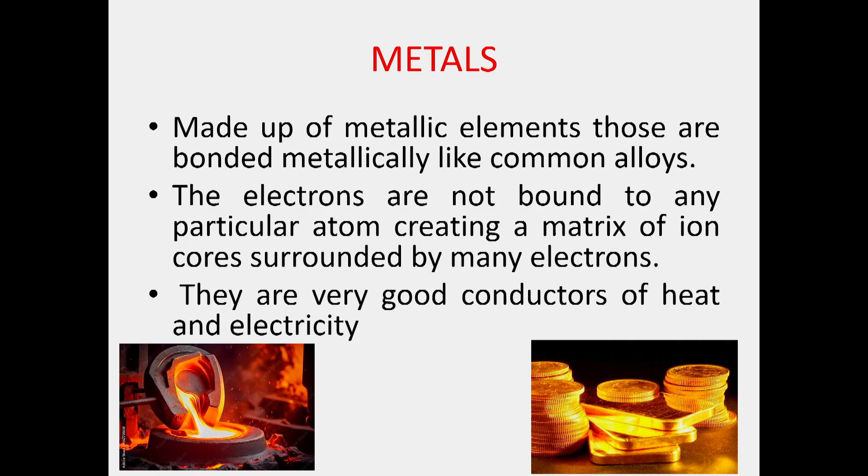So metals are typical materials having features like malleability, ductility, high electrical conduction, thermal conduction, metallic luster, etc. We need these properties for some engineering applications. There we do not have a substitution for metals. Metals should be used for that.

As a chemist, when we look into the construction of metals, it is something different. Metals are made out of nuclei, with a large number of electrons floating within. No electron belongs to a special nucleus; electrons belong to all nuclei. Electrons are happily running, and these running electrons are the postmen for the conduction of heat and electricity. So the assembly of metals is totally different, giving them charming properties.

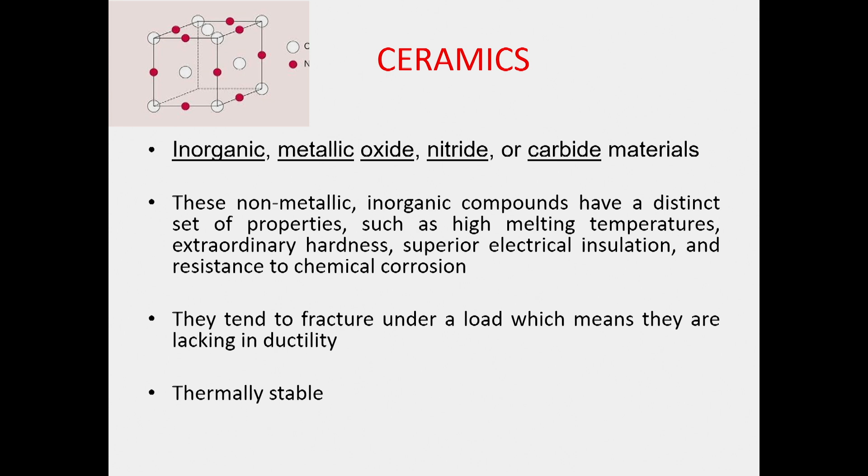If you look into the second category of materials, which are basically inorganic metallic oxides, nitrides, carbides, etc., we use them in everyday life. Even our wash basin is made out of a ceramic material, right? The beautiful tiles at home are made out of ceramics.

Many furnaces, typically the blast furnace, have an inner liner. No material can be used for that inner liner except ceramic, because the temperature goes up to 2000 degrees centigrade. So there is no substitution for that. When an inner fabrication of a furnace is required, only ceramic can be used.

We have seen in our old homes, our grandmothers used to make small furnaces out of bricks because they can withstand very high temperature. So when conduction, electricity, metallic resistance, etc. are the priority, we look for metals. If thermal resistance and inner lining fabrication of a furnace are the priority, ceramics are the priority.

Then we move to the third category of materials called polymers. These materials have a beautiful assembly. We all know small molecules, but scientists thought, if small molecules are connected together, why can't we make big molecules? Independently we are weak, but if we collectively sit together, we are strong. That's the basic principle of the construction of polymeric materials.

When a substance has a double bond or two functional groups in a molecule, that molecule can be polymerized. Single, saturated molecules cannot be polymerized. Methane alone is stable; it does not have the tendency to connect with a second molecule in a dimerization procedure. But ethylene has a double bond, so you can combine two ethylene molecules together to form diethylene.

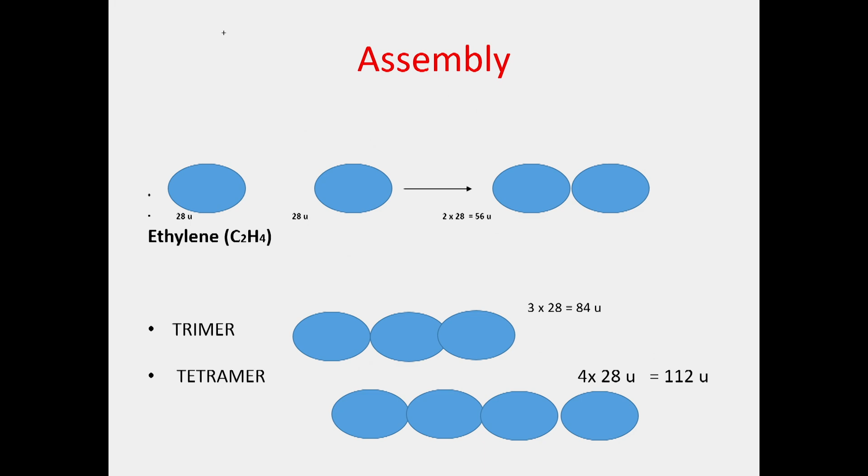So what we do is take ethylene. When ethylene is subjected to dimerization, you get diethylene, trimerized with three molecules, tetramerized with four molecules. When you do that, the length is enhanced to nano dimension. A single atom or molecule is in atomic dimensions - angstrom, 10 raised to minus 10 meter.

But when 10 of them combine together, we enter into nano dimension - 10 molecules, 10 into 10 raised to minus 10 is 10 raised to minus 9 meter, that is 1 nanometer. So we enter into the nano domain. Polymer science is nanotechnology - combining molecules together into nano dimensions, 500 nanometers, 1000 nanometers, etc. When we make such molecules, they have spectacular electrical, mechanical, and magnetic properties, which you can modulate.

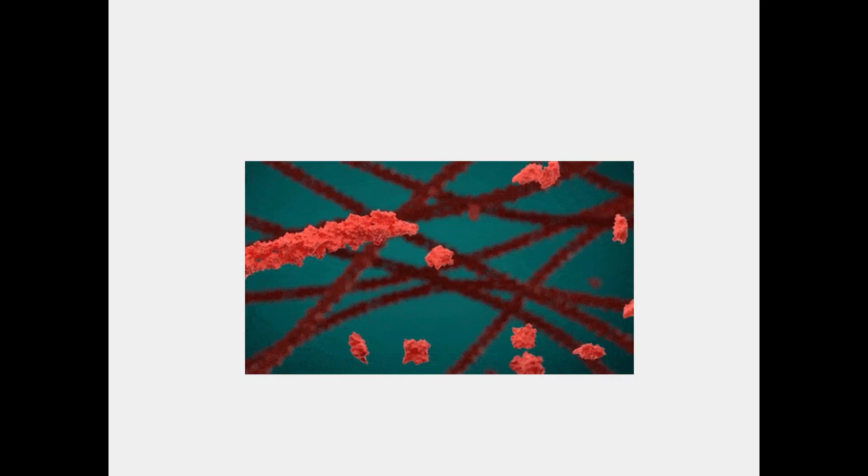So this is the job. People live for that, to make molecules which others have not seen. That's the dream of a scientist, making molecules or systems which others have not seen so far. Every evening they pray, help me to make a molecule which others have not seen. That's my contribution to society.

Why do we make such molecules? Because such molecules are useful to society. We all live for supporting the society, to support poor people, to support weak people, to make a better world. We do that by contributing, by making new types of molecules in the field of automobiles, building materials, consumer goods, space products, etc. We live for that, making new types of molecules.

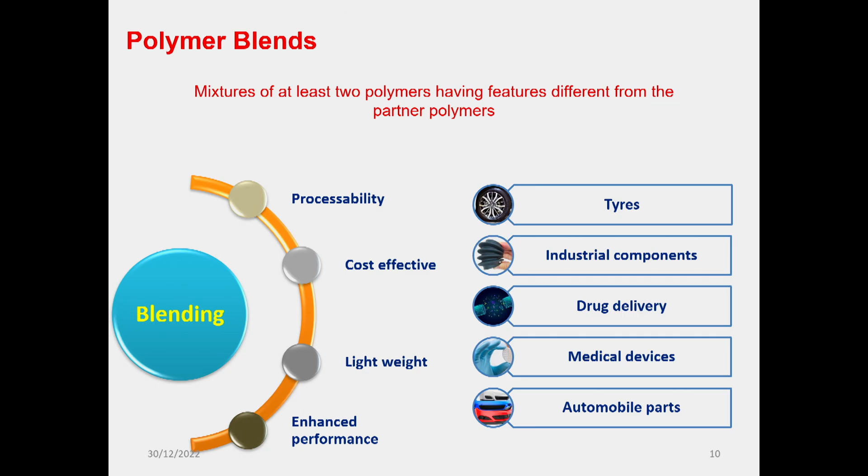Now I will be telling you a strategy we do, just like I said, a polymer blend, to take two molecules together, mixtures of two molecules. So X and Y, two molecules are there. X is a polymer, Y is another polymer. I try to mix them together. I will be getting sometimes a product like yellow, sometimes a product mixed together, sometimes another type of product.

When X and Y, red and green, are mixed, sometimes I will be getting a completely miscible product, yellow. I'm highlighting the prospects. When two materials are combined, they can be combined in different ways, and therefore different types of products can be derived. Sometimes the product could be completely miscible, sometimes partially miscible, sometimes they remain independent, immiscible. When we do that, the products will have different features, and therefore they can be employed for different types of applications.

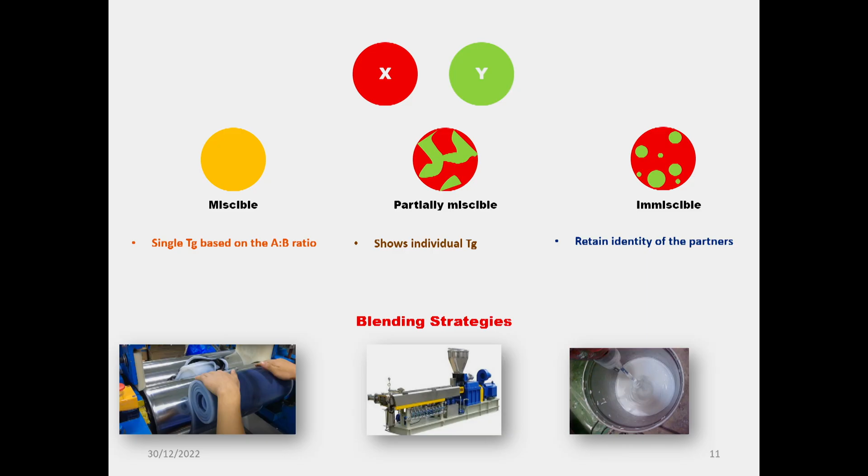So if you look into that, there are different types of how to make polymer systems mixed together. This session, and in subsequent sessions, we will focus on how to make different types of polymer combinations. But that's not our focus now. Our focus is composite systems.

And then biocomposite systems. Composites are: you take a polymer, and you find that polymer has some inferior, lower properties. What you do is identify a powder or a fiber and carefully add it. We will do it in the afternoon. You have a polymer with you, but you find that it has some inferior properties. What you do is add a powder or a fiber into that, mix them together. You will be getting a product.

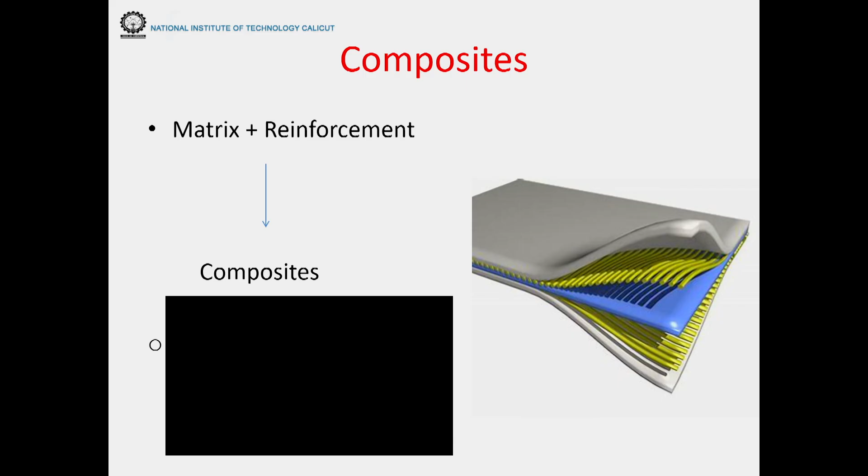See this product, on the extreme right hand side. You see an outer layer. The outer layer is a polymer, but inside that you will be having different types of materials you add, sandwiched. So now we will be having a new material - the weak polymer now becomes strengthened.

So the polymer substance we make is known as a matrix - the basic material which is to be modified. That with which you modify it is known as a reinforcement. Since you support us, you are the reinforcement. When we work together, we develop a new material. So the equation is: matrix plus reinforcement gives a composite system.

You can take polyethylene, polypropylene, any types of rubber as the matrix. You can take titanium dioxide nanoparticles, SiO2 particles, carbon particles, multi-walled carbon nanotubes - anything can be taken as reinforcement. See, hundreds of combinations are there, hundreds of combinations.

Me and Amina, we combine together to make a composite system. Me and Ashwati make another composite system. Ashwati and Amina make another composite. See how many combinations we can make, logically, depending upon the requirement. When the client comes, we ask, what do you want? I want a set of properties. So we combine, she's having that property, combine them together. So that's the logic in composition - combining materials judiciously, that depends upon your passion for doing science. So a large number of products are sitting on the left hand side, a large number of products sitting on the right hand side. So make suitable combinations, you will be making new materials.

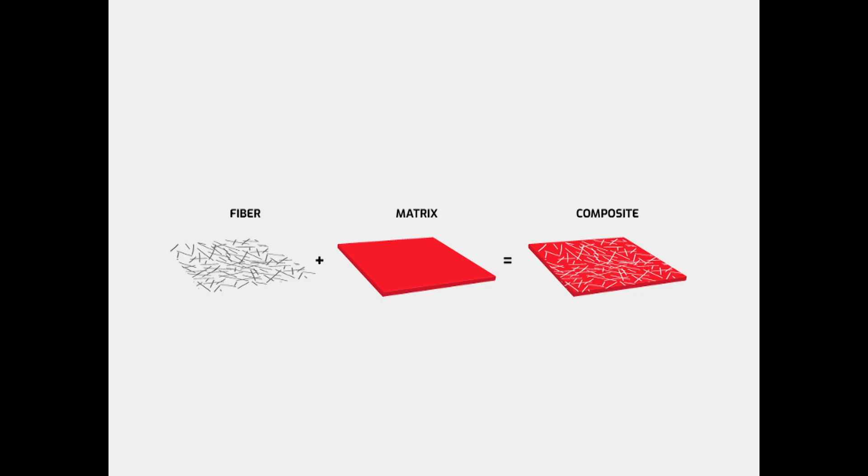You take a fiber or a powder, and it is added into a matrix. You can see the morphology, the structural, beautiful structure. Many changes happen: the morphology and structural aspects get changed, thermal features get changed, mechanical properties get changed, electrical properties get changed, optical properties get changed, biological aspects get changed. So you do complete alteration to the basic material and have a new material known as a biocomposite system.

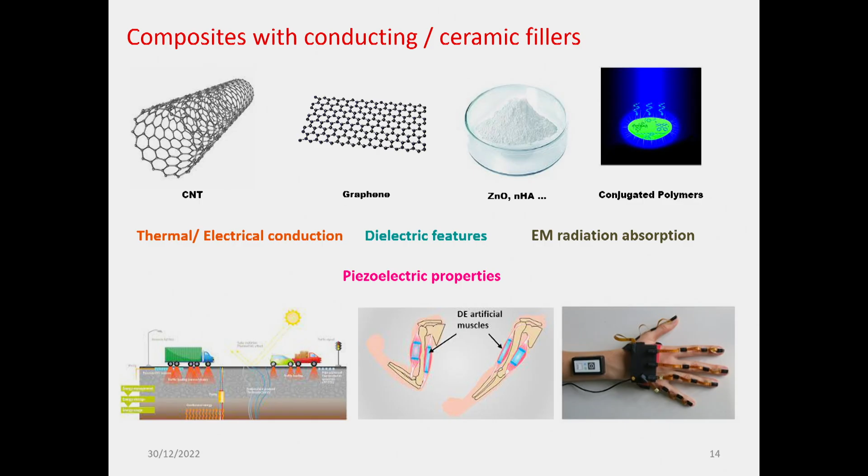So the composite system playing is wonderful. In the new modern world, a lot of areas need our attention. You can have, as I said, carbon nanotubes, graphene, zinc oxide, nanohydroxyapatite - any type of systems can be reinforced into the system. If you judiciously select bio partners that will induct bio properties, nature, environment friendliness, etc., you want to call them preferably a biocomposite system. Such systems are used for making a large number of products.

Some products in space, some basically piezoelectric systems. If time allows, we'll be speaking to you on piezoelectric systems derived from biocomposites. A lot of biomedical applications - many products can be derived from this composite system. So you have a lot of options.

You can take a rubber, a thermoplastic, or a thermoset. You can take a particle or a fiber. Basically, hundreds of combinations are possible in the field of biocomposite systems. Such products are being used - Boeing uses biocomposites, Benz cars use biocomposites, helmets, a lot of civil construction, mechanical and electrical people, all use biocomposite systems. They try to replace conventional synthetic material systems using more environment-friendly material, light materials, high-performance materials, corrosion-less materials.

So these are telecommunication towers - we have a lot of applications in the field of biocomposite systems. This is a beautiful biocomposite system, I'll show you. It contains - now you can see this is the basic matrix.

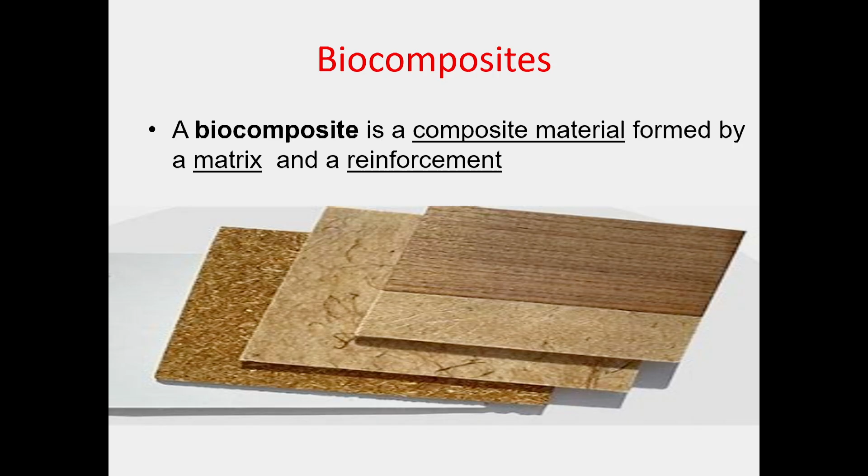Sometimes we cannot have a physical difference - sometimes you can see which is the matrix, which is reinforced. Sometimes if they get uniformly mixed, your eyes cannot detect that. But at the microscopic scale, using a scanning electron microscope or transmission electron microscope, you can find phase separations. We'll be seeing that in subsequent days. Earlier, the definition of composites was that you can identify phase separation distinctly, but now you cannot do that.

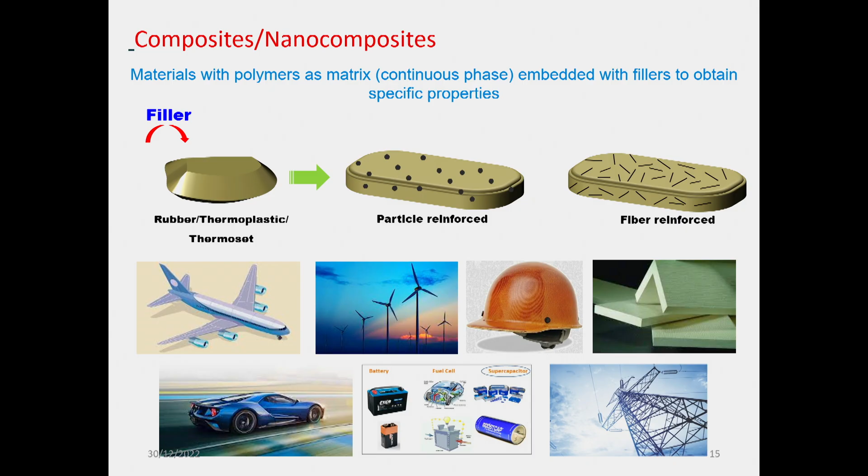They get integrated in many systems, particularly nanocomposite systems. So in a biocomposite system, the matrix and the reinforcement have distinct roles.

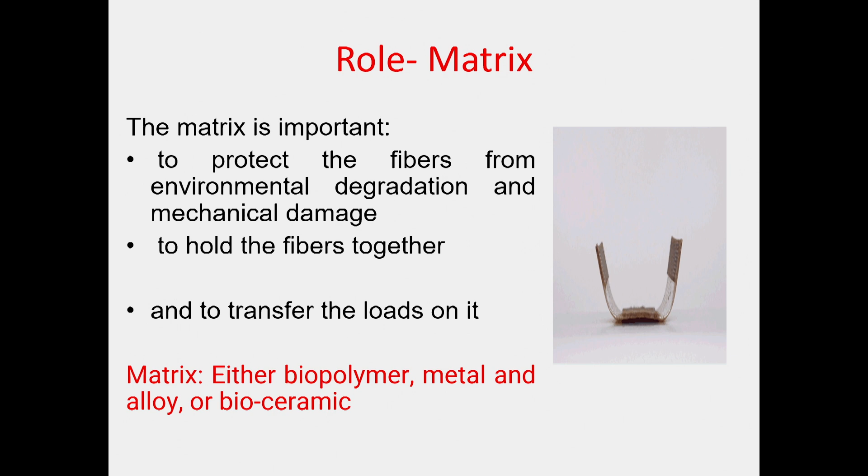Typically, you have heard of banana fibers - they're beautiful fiber. I have a friend in Wayanad who has banana cultivation. He will give you banana free, but he will not give you banana fibers, because banana fibers cost 120 rupees per kg in the market. He'll process it and make more than 5,000 products. So the products are from banana. You know that after the service period, banana fibers can be sent into the environment.

But banana fibers are foldable - the structural integrity is not there, you cannot make a rigid substance. For that, the matrix is added. With the matrix, you'll be giving a shape - that is the role of the matrix. The matrix gives the shape, etc. But the strength and other properties will be modulated by the fiber, by the reinforcement you use. So the matrix has a function for structural integrity, and the performance factors are contributed by both of them.

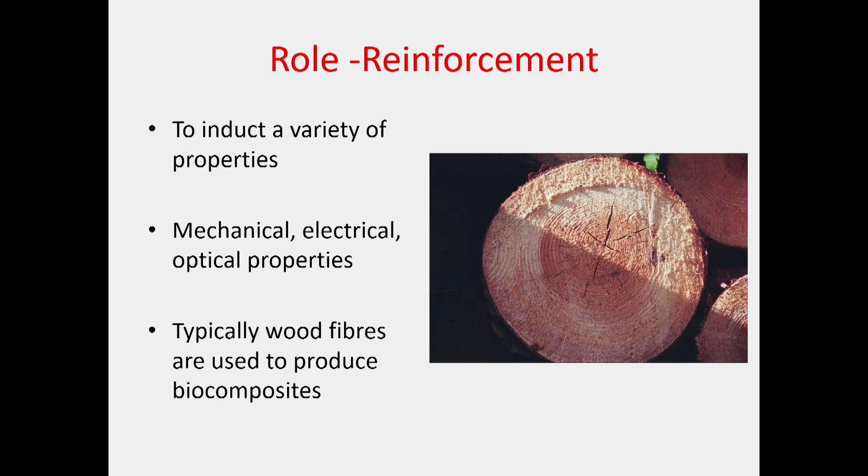Wood you have seen, no? Wood can be converted into different forms. Wood can be powdered, giving very high strength, and that can be added to a polymer matrix to make a composite system. Many products are being derived from that.

You have heard of plywood. Ply means layers, thin layers of fiber, etc., but they are joined by a polymer. The polymer acts as adhesive. If you compress it together, you get a multi-layer, high performance system.

You can take bamboo and powder it. In Kerala we have a lot of bamboo fibers. You can use it in the fibrous form or the powder form, and add it into a polymeric system. You get a basic material which can be molded into any shape.

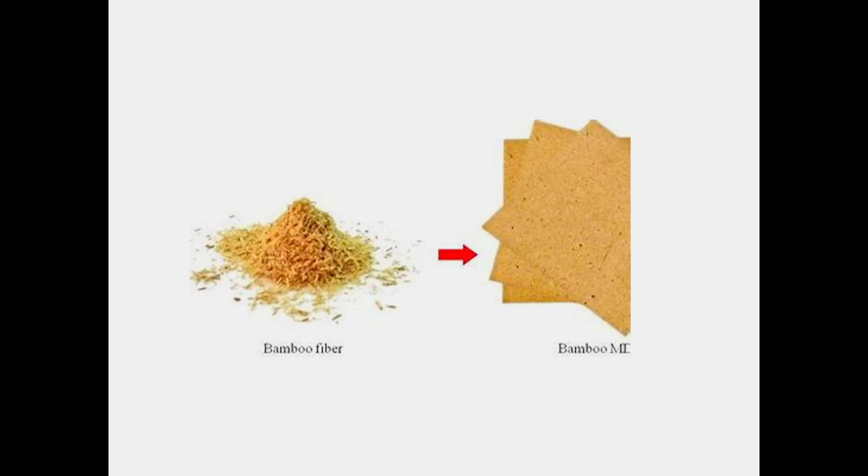So in this room, you can see how many products are there: AC, fan, desk, chair, platform, dais. You can find out how many products in this room can be substituted by a composite system.

When you make a reinforcement, you are doing wonderful engineering. You can induct a large number of properties, including smart material behavior. You have heard of shape memory, the memory effect. Materials can have a memory effect. Rubber has a memory effect. If you stretch a rubber band, when you apply a deformative force, it undergoes deformation.

Stress is proportional to strain, that's Hooke's law. The rubber band undergoes deformation, but it does not like it. The moment you release the stress, it tries to go back, saying 'this is not my shape, I will go back to my memory.' That's the memory effect operated by materials.

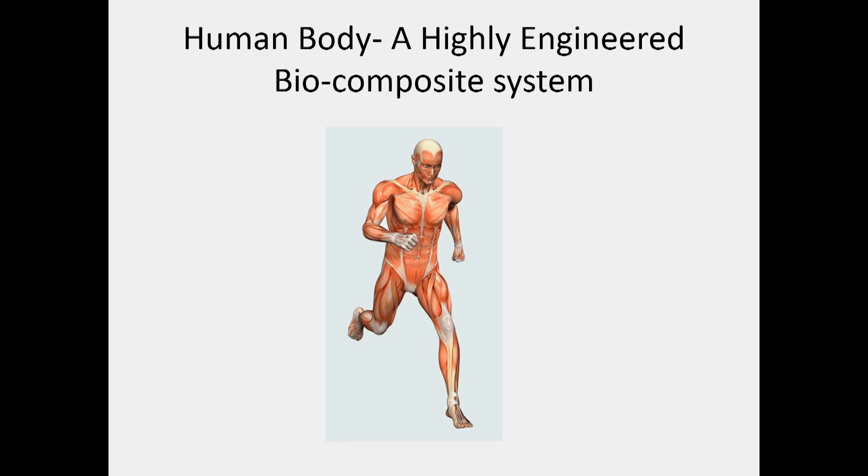Many matrices can be inducted with a memory effect through careful combination of different types of systems. This is the ideal example of a biocomposite. You are a biocomposite because two components are there in your body: flesh, that's the matrix, and your bone, skeleton, that is the reinforcement.

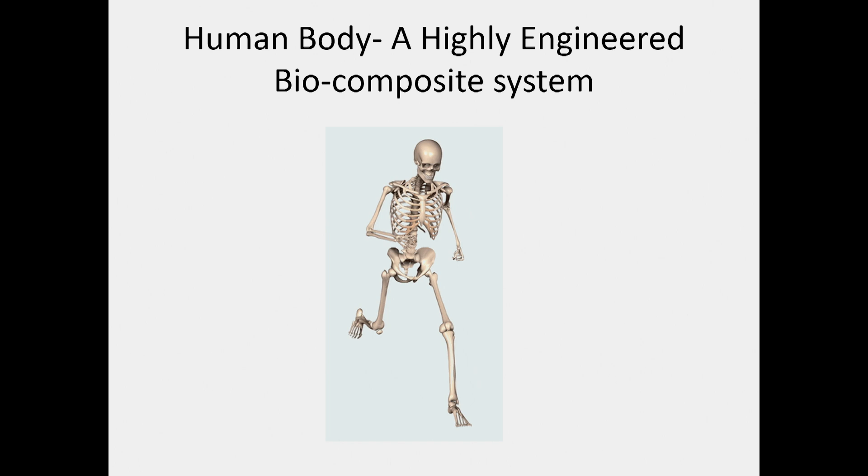So they integrate together. The Eiffel Tower in France, its construction, the basic philosophy of the Eiffel Tower is derived from our body. This body is a wonderful biocomposite system, triggering many engineering and scientific thoughts. You can see the reinforcement and the flesh added composite system.

So basically, in all calculations, you have the rule of mixtures. A composite is like a marriage, a husband and wife system. Husband alone, wife alone, that's not a family. When someone marries, we become a composite system, matrix and reinforcement. Thereafter, husband has a contribution called sigma m.

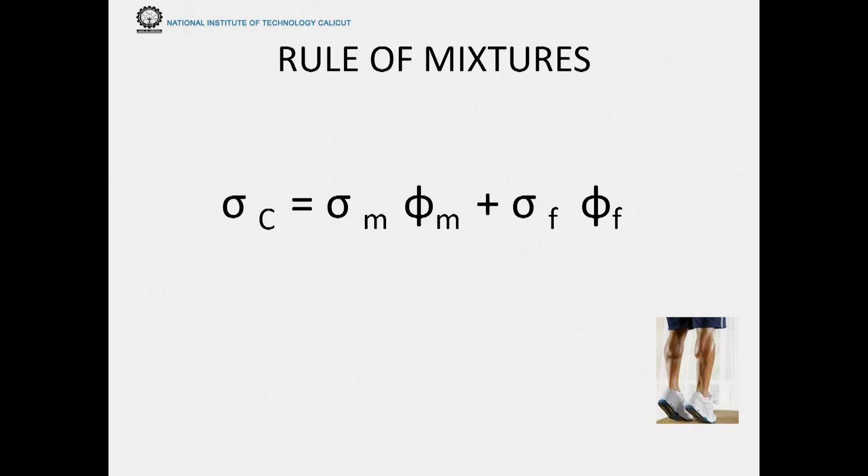Any property of the composite, sigma c, this is called the rule of mixtures. Any property of a composite, why do you make a composite system? Because of the sigma c equation. Sigma c, any property you derive for a composite system, is contributed by husband and wife. Sigma m is the property of the husband.

Phi m is the volume fraction, the quantity of volume fraction, just like mole fraction. Mole fraction maximum value is 1, running between 0 and 1. All fractions run between 0 and 1. Therefore, if phi m is 0.6, phi f is 0.4. If phi m is 0.3, phi f is 0.7. Maximum value is 1.

So the property of the matrix times the volume fraction of the matrix, plus the property of the fiber times the volume fraction of the fiber, gives the property sigma c. This is the basic philosophy. If you're employed at NASA or any organization, strength calculations for a composite system are always based on this. They ask you, sir, what is your targeted sigma property? They give you the targeted properties, and based on that, you make the volume fraction set depending on the requirements.

When you make a composite system, this is the logic in organization. The fibers can be aligned - you get a rectangle or square matrix. You can see vertical lines, horizontal lines, etc. That's called alignment. You can have horizontal alignment, vertical alignment, or both together.

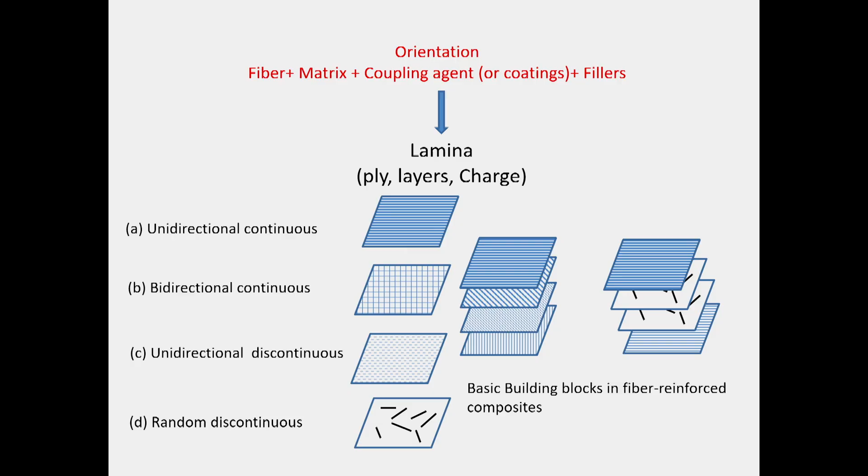Now, quickly I will go through these slides. In the afternoon half-hour session, I will tell you how to make composites - but before that, my professor will be enriching you on how to make a composite system. I will include these next 7 slides on composite making, from hand-made composites to the field of 3D printing, the modern additive manufacturing. Before the laboratory, we will be speaking to you on the composite system.

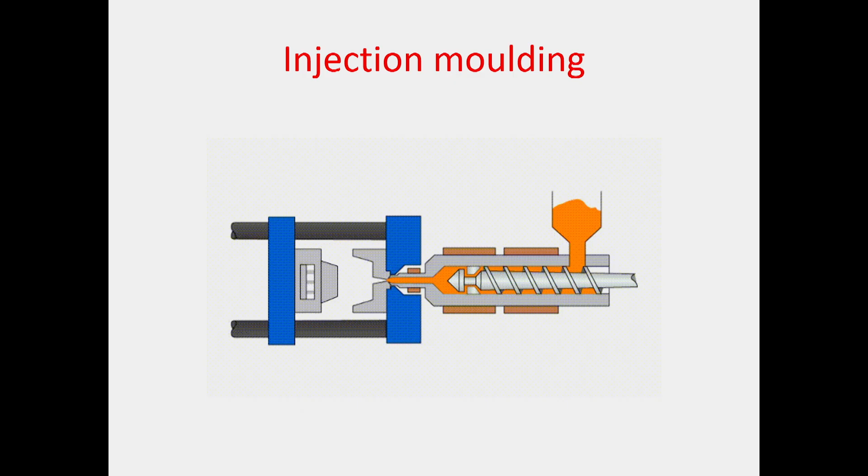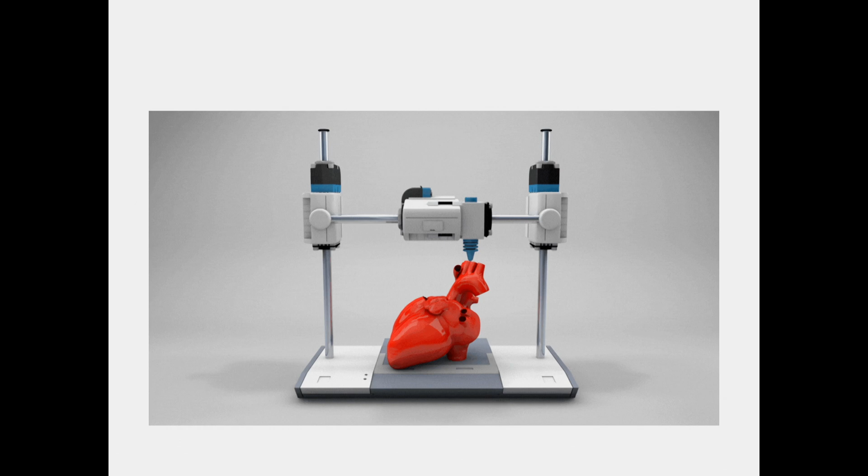So these are wonderful techniques we will cover: injection molding, extrusion, blow molding for making bottles, and 3D printing. Anything can be made this way.

So we understood what a biocomposite is. Secondly, we discussed alignment. Then we discussed composite making technology, which the professor will explain in the second session, and I will supplement some notes in the afternoon. Then, before presenting to clients, I have to convince myself what properties I gain - mechanical, rheological, thermal, electrical, solvent resistance, optical aging. This is our target for the laboratory sessions.

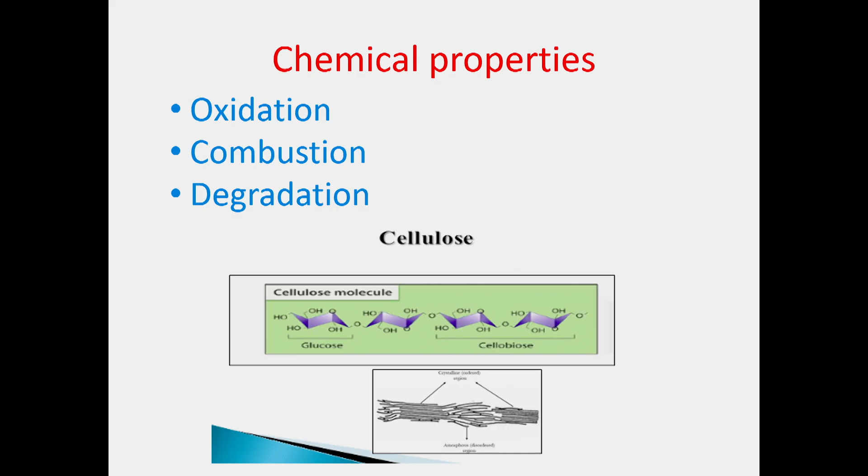We'll look into how features are evaluated by different techniques - this will be in the afternoon. Then we will look at chemical properties, checking whether this new composite will undergo unwanted oxidations, sometimes combustion reactions, sometimes degradation. That evaluation also has to be done for a composite system.

So we covered what a biocomposite is, then its alignment, then quickly the fabrication properties, then the characterization protocols we use. After passing all these stages, we enter the field. After making a beautiful molecule - for whom, for what? If it has value, it should be useful to society. For that purpose, I will scan the different biomedical properties that could be evaluated.

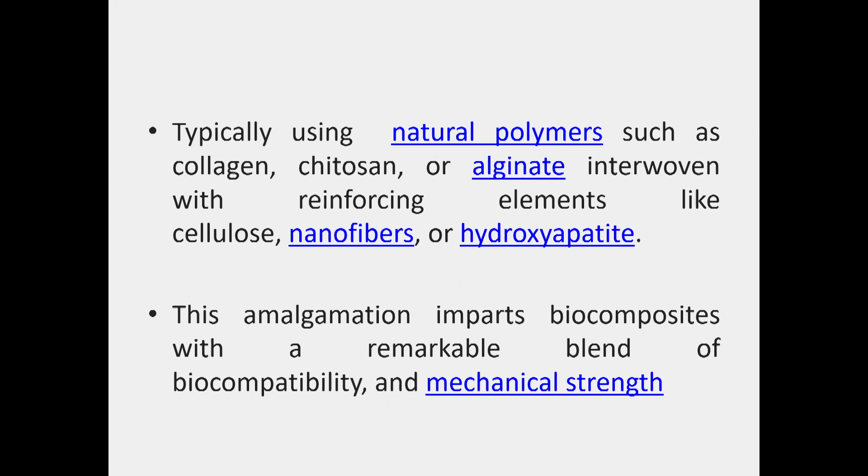We will look at whether this biocomposite can be used for making a scaffold for tissue engineering, body parts, or implants. That's my investigation - so many natural polymer systems: collagen, chitosan, alginate systems. We extensively scan the literature from our group.

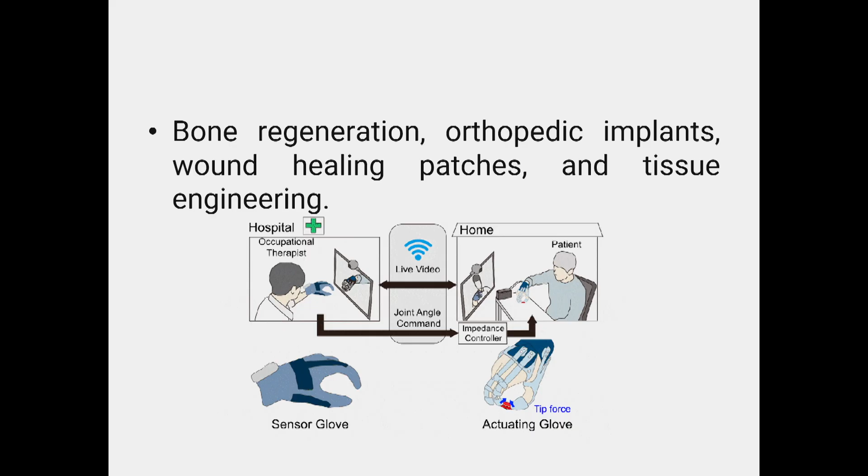Say someone has an orthopedic requirement, or needs an orthosis - some people may not have hands or legs. You can develop systems, combine mechanical features into the system, and beautifully modify and support society - bone regeneration, orthopedic implants, wound healing applications. Many systems are derived from biocomposite systems.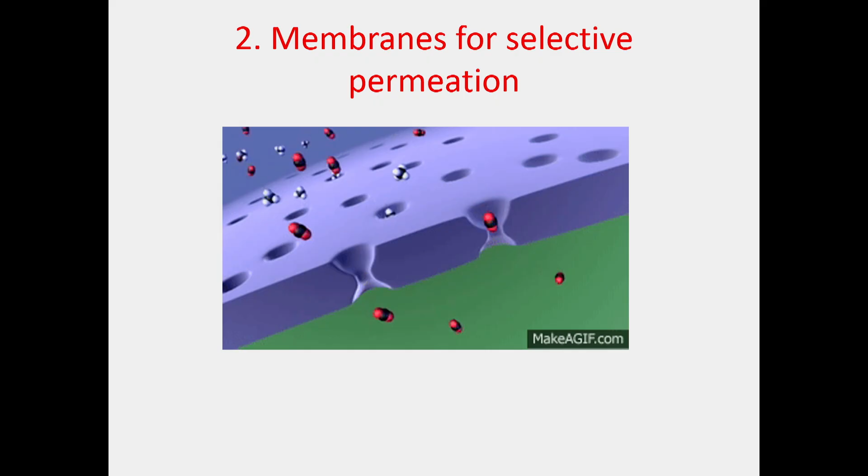Another major application area for biocomposites is membranes. Singapore and Malaysia - Singapore is a very powerful country, but they do not have even a drop of water to drink. If you visit a home in Singapore, they won't give you water free, but they will give you Coca-Cola free, because they don't have water. That was converting a disadvantage into an advantage - that is the job of a scientist.

So they started developing high-efficiency membranes, and they are now leaders in making membranes in the world. In universities, many professors have connectivity with membrane companies, and many membranes are now being developed out of biocomposite systems.

Second application area: optical applications. All communications in the world now largely happen through optical fiber cables - you might have seen OFC. OFC has a core and a cladding, and communication happens through the core.

The procedure is called total internal reflection. In Gulf countries, you might have seen these long wires coming, light sent from one tip, light comes from outside, no loss in between. These are optical fiber cables, and the procedure is called total internal reflection.

The cladding does not permit light to go out. Complete internal reflection happens within the core area. Many biocomposite systems are being tried for making optical fiber cables.

Another very major property is light emitting diodes. All the lights in this room are based on light emitting diodes, having PN junctions made of conducting polymers. In a PN junction, you sandwich a biocomposite system which can give more energy protection and energy performance.